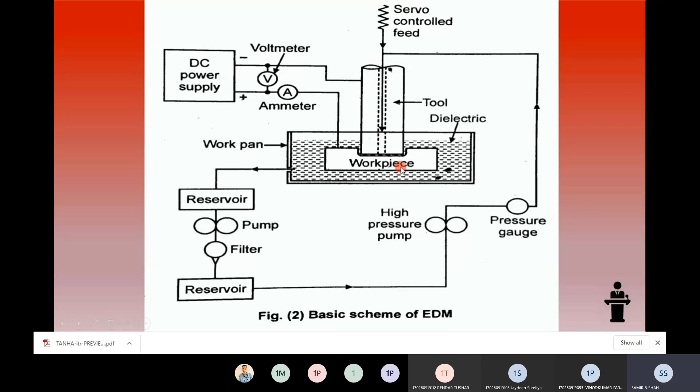Today we will discuss electric discharge machining, EDM. EDM is generally known as the effect of electric spark occurring between two electrodes that are separated by a dielectric liquid.

So here we have a tank. In this tank, dielectric fluid is filled, and the main function of the dielectric fluid is it flushes the eroded particles from the machining gap, provides insulation between the electrode and the workpiece, and cools the section that was heated by the discharging effect.

The main requirements of EDM dielectric fluids are adequate viscosity, low cost, good electric discharge efficiency, high flash point, good oxidation stability, and minimum odor. So for most EDM operations, kerosene is used with certain additives that prevent gas bubbles and deodoring.

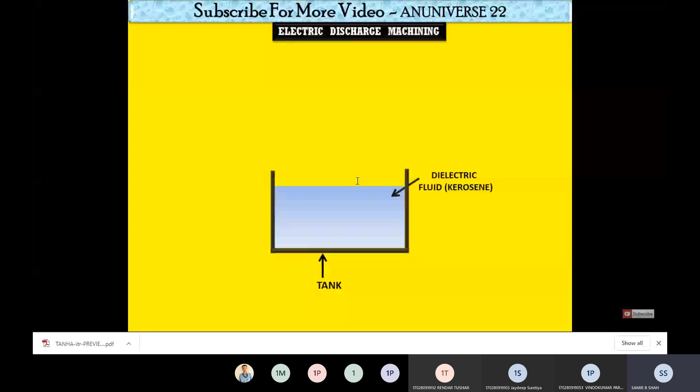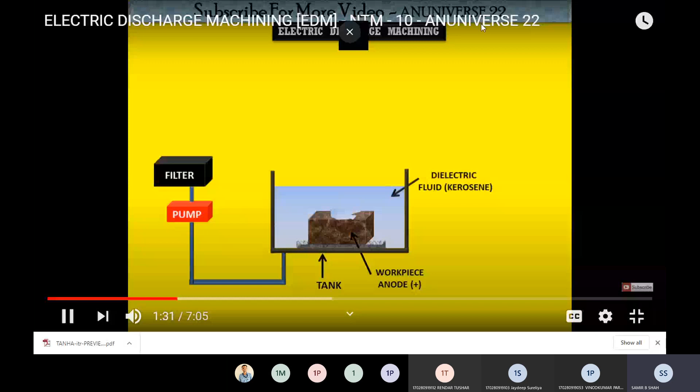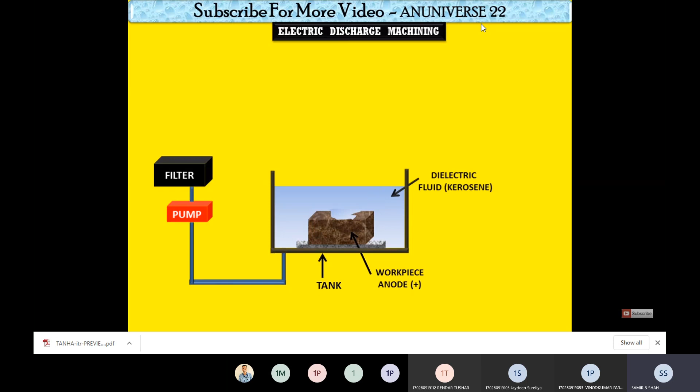This is a fixture on which the workpiece anode is mounted. This is a pipeline that goes towards the pump, and this is a filter that is generally used to remove the debris remaining in the fluid and supply the filtered dielectric fluid to the tank and through the electrode.

And this is a flushing nozzle. This is the graphite or copper electrode, normally negative charged and the cathode.

Metal with high melting point and good electric conductivity are usually chosen as tool material for EDM. Generally graphite is the most common electrode material, since it has fair wear characteristics and is easily machinable, and small flush holes can be drilled into the graphite electrode.

Copper has good EDM wear and better conductivity. Copper graphite is good for high machining rate as well as low electrode wear, and it has better electrical conductivity than graphite, while the corner wear is higher. So these are some specifications for choosing the electrode for EDM.

So from here the dielectric fluid is supplied through the electrode from the filter, and this is the tool feed. Generally the tool feed is provided from the servo control unit, which maintains a constant machining gap that ensures the occurrence of active discharge between the two electrodes.

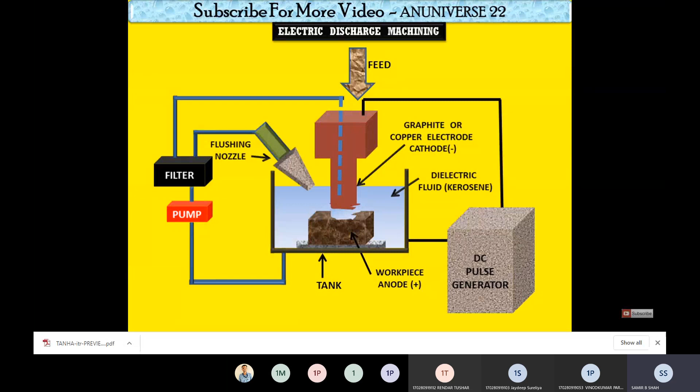And this is the DC pulse generator. The power supply is responsible for supplying pulses at a certain voltage, current, on time, off time, with a series of voltage pulses of magnitude about 20 to 120 volts, on the order of 5 kilohertz, between electrodes that are separated by a small gap. Generally, the small gap between this electrode and the workpiece is approximately 0.01 to 0.5 mm.

When using this DC pulse generator, the voltage pulses are responsible for material removal. Metal removal takes place as a result of the generation of extremely high temperature, generated by high intensity discharges that melt and evaporate the two electrodes.

So here we can see these are the sparks that are generated with the help of the DC pulse generator. These are the spark, and this is the dielectric fluid coming out through the pump, then through the filter and through the flushing nozzle.

Flushing of the dielectric plays a major role in maintenance of stable machining and the achievement of close tolerance and high surface quality. One important thing: inadequate flushing of the dielectric causes arcing that decreases electrode life and increases production time. So here, this is the tool, this is the workpiece, and this is the spark.

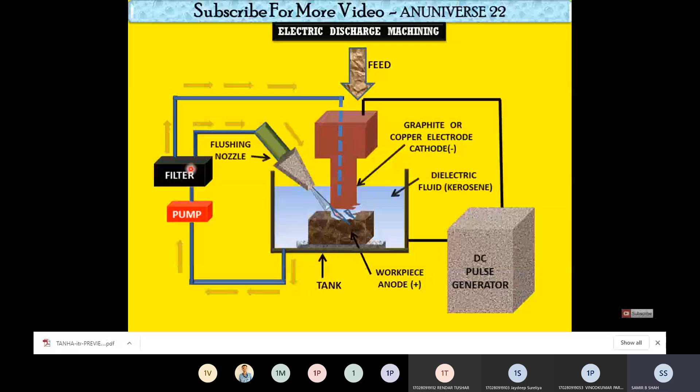Supply the dielectric fluid, and it is moving towards the pump and then through the filter. After removing the debris from the dielectric, it again flows through the flushing nozzle and through the tank. This is the process that we have discussed today, EDM.

So guys, EDM is a non-conventional process which uses electric spark to remove metal from the workpiece. The metal is removed from the workpiece by means of this electric spark, which is used as a cutting tool to cut the workpiece and produce the desired shape.

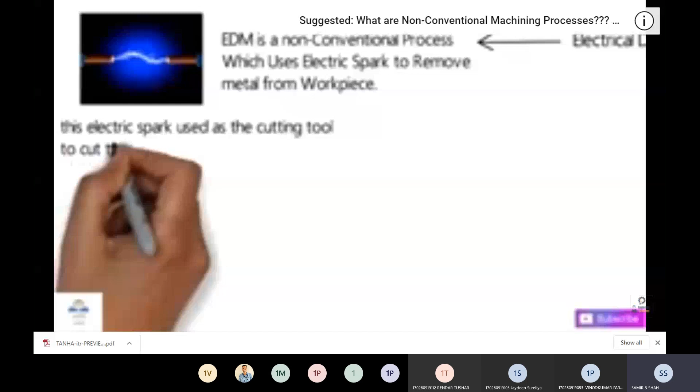So guys, this is the actual representation, we can call it a line diagram of the EDM process. This process is done by applying high frequency current through the electrode and workpiece, and current is supplied by the power supply. The spark removes the metal in the form of very small chips, which we can call microchips. This process is done in dielectric fluid, with both tool and workpiece immersed in it.

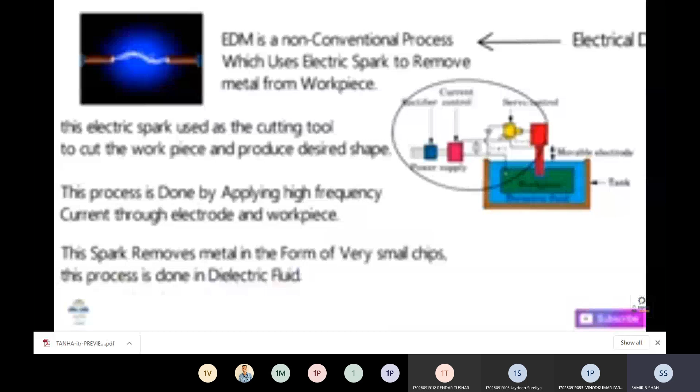Let's check out the working principle of EDM. EDM works on the basic principle of spark generation, that is, the metal is removed by spark erosion. The spark generation produces heat, and this heat ultimately removes the metal by erosion and evaporation on the surface of the workpiece. So guys, this is another representation of this particular process. The tool and the workpiece should both be conductive, and this whole process takes place in the dielectric fluid.

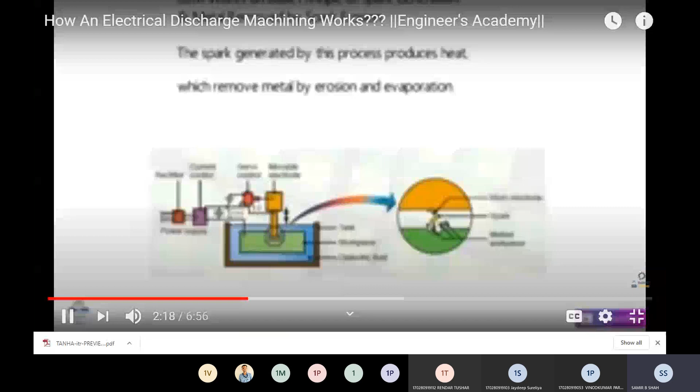So guys, let's check out the equipment used in this EDM process. As we can see in this image, the first one is the power supply. The high frequency current is supplied by the power supply, which is a very important factor.

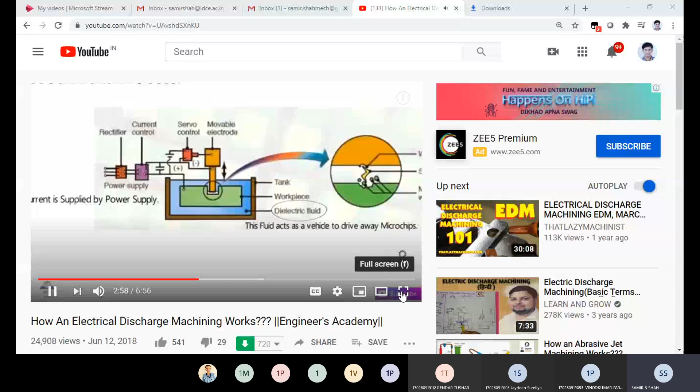Next is the dielectric fluid, which helps drive away the microchips formed in this process. This dielectric fluid prevents the small chips from sticking to the surface of the workpiece, and it also acts as a coolant.

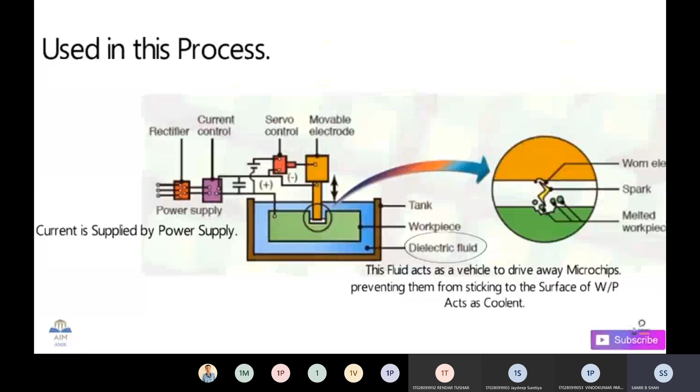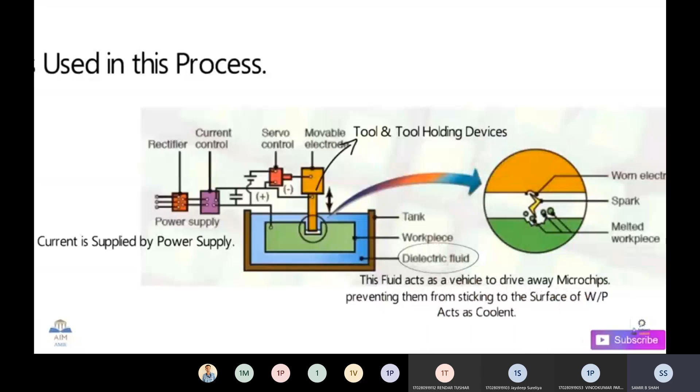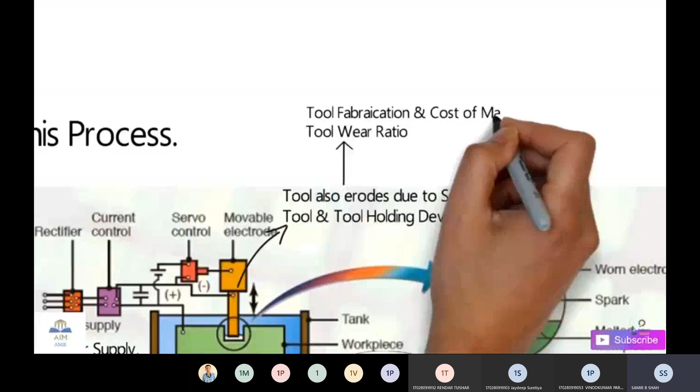The next important equipment is the tool, or the tool holding device. The tool is a very important factor here, and it also erodes as the workpiece erodes due to the spark. The selection of the tool is very important, and it is done on the basis of wear ratio, tool fabrication, and cost of the material. The main materials are copper, tungsten, alloy steel, cast iron, stainless steel, or graphite.

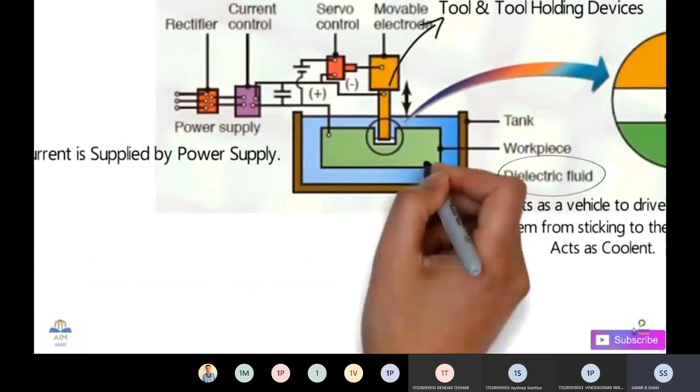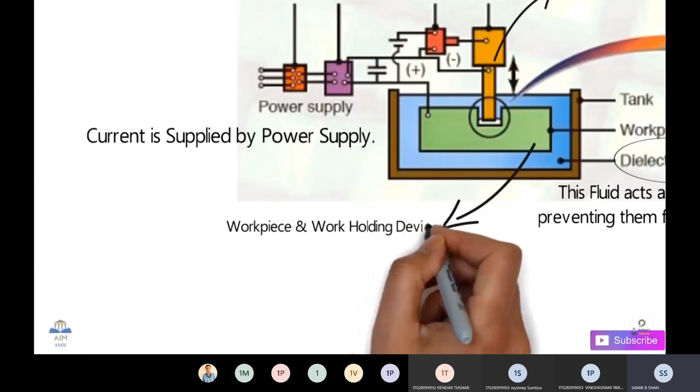The next equipment is the workpiece, or the work holding device. In this process, the workpiece needs to be a good conductor of electricity; only then can it be machined. It does not depend upon the hardness of the workpiece, the hardness can be anything, very high or very low, and we can machine both.

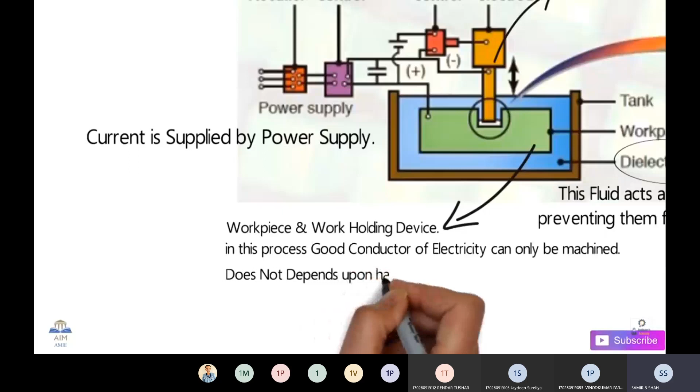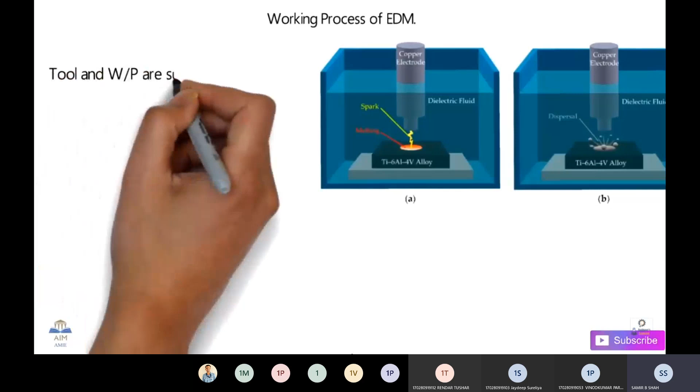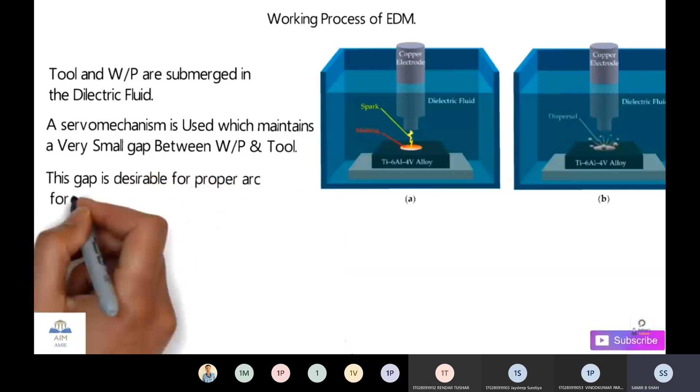The next is the working process of EDM. This is a 3D image, guys. The tool and the workpiece are both immersed in the dielectric fluid, submerged and the whole process is carried out in this fluid itself. A servo mechanism is used which maintains a very small gap between the workpiece and the tool. This gap is necessary for proper arc formation, and it is about the thickness of a human hair, very small, guys.

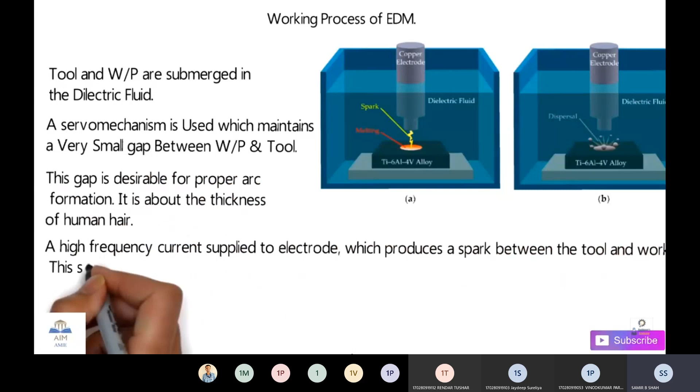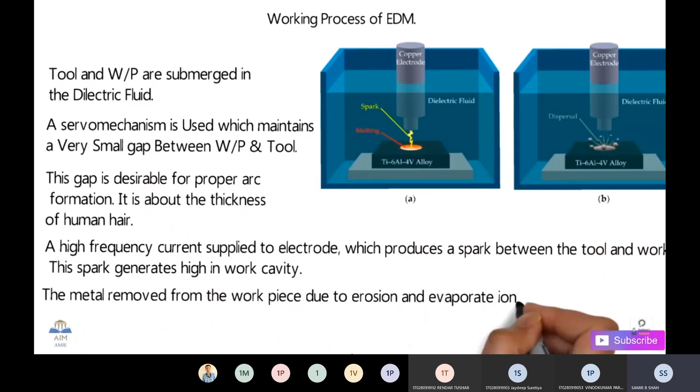High frequency current is supplied to the electrode, which produces a spark between the tool and the workpiece. This spark generates high heat in the work cavity, and the metal gets removed from the workpiece due to erosion and evaporation. So guys, we have seen this working too.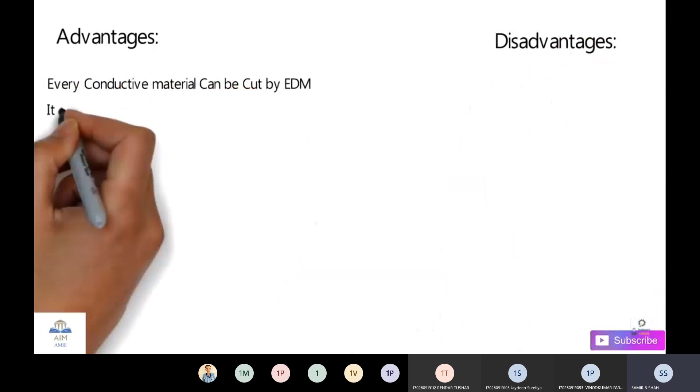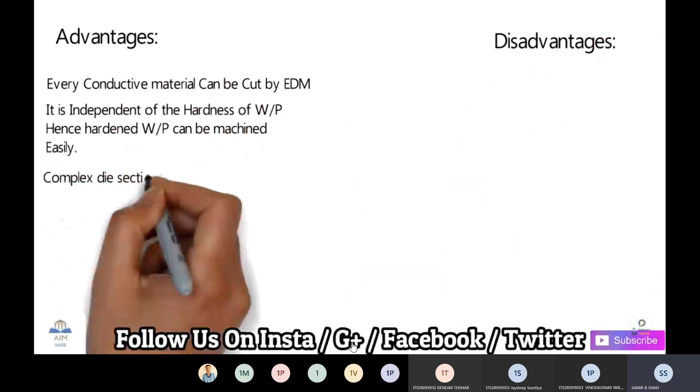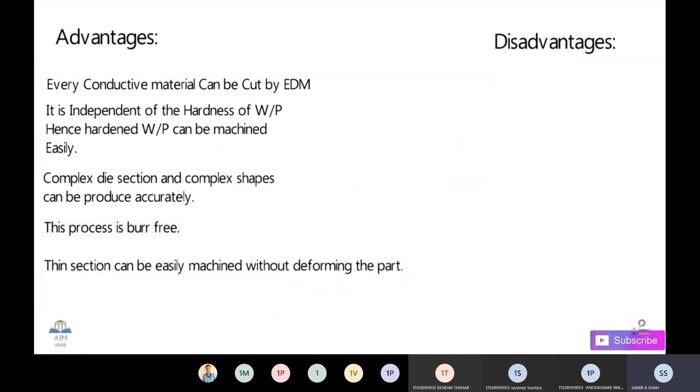Let's talk about the advantages and disadvantages. Every conductive material can be cut by EDM, and it is independent of the workpiece hardness, so hardened workpieces can also be machined easily. Complex sections and shapes can be easily machined with high accuracy. This process is burr-free, with a very small amount of chip formation, and thin sections can be easily machined without deforming the part. So guys, those were the advantages.

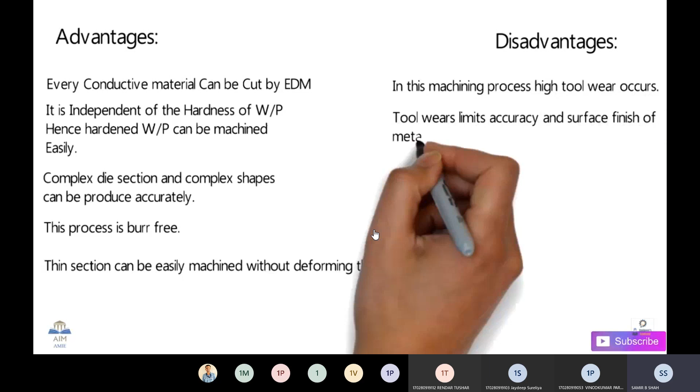In disadvantages, high tool wear occurs in this machining process due to the spark, and this tool wear limits the accuracy and surface finish of the metal. Also, only a good conductor of electricity can be machined by EDM.